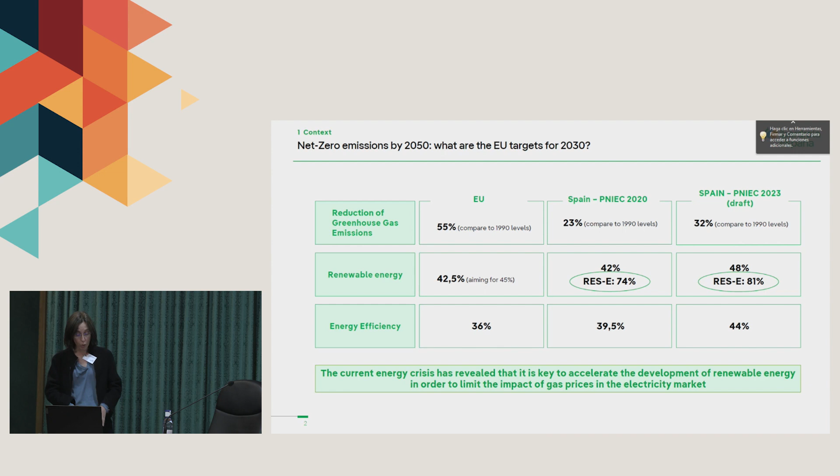In any case, what I would like to show you is that the Spanish government is moving forward more ambitious, more commitment, more greenhouse gas emission reduction, and more renewables. For the electricity sector, I think this is really challenging, because the figure we have already is that we would like our generation energy mix to be 74% based on renewables, and the new draft sets a target of 81% renewable energy in the generation mix. So of course this is a challenge, and this implies really moving forward with a massive movement on investment.

Unfortunately, nuclear is not the winning technology. According to the Spanish government, it is expected that, according to current information, nuclear power plants will close after their lifetime, and so there will be 4 gigawatts less nuclear capacity in Spain by 2030, according to this provisional draft. So what does it mean? The investment challenge is clear, and it means that we all need to accelerate. I will give you some figures so that you can understand this investment challenge.

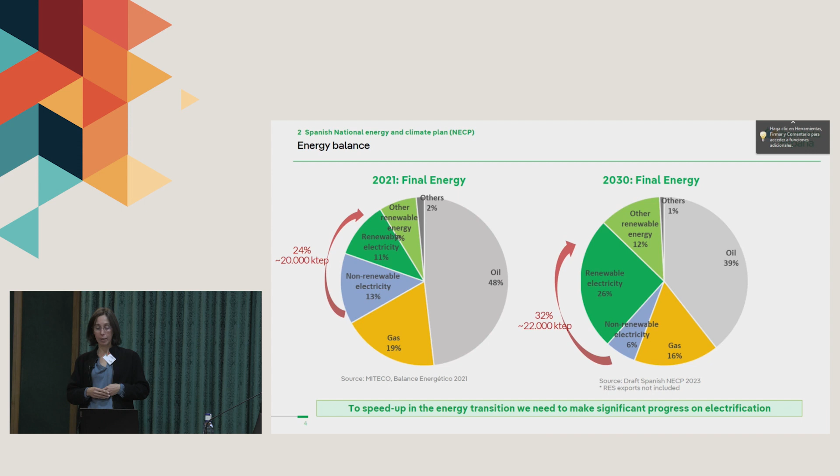That's why the message we wanted to tell you is that we need to speed up also in electrification. There is much more that needs to be done on flexible demand, so that we can take the best advantage of that renewable capacity that could be developed, hopefully in Spain.

When we look at the renewable power generation cost, we can have different data, but we know the reduction in cost has been amazing, and today it is competitive. So today we have two things: we have the technology development, which makes economic sense, and we also have what we call regulation, the economic tool to develop that.

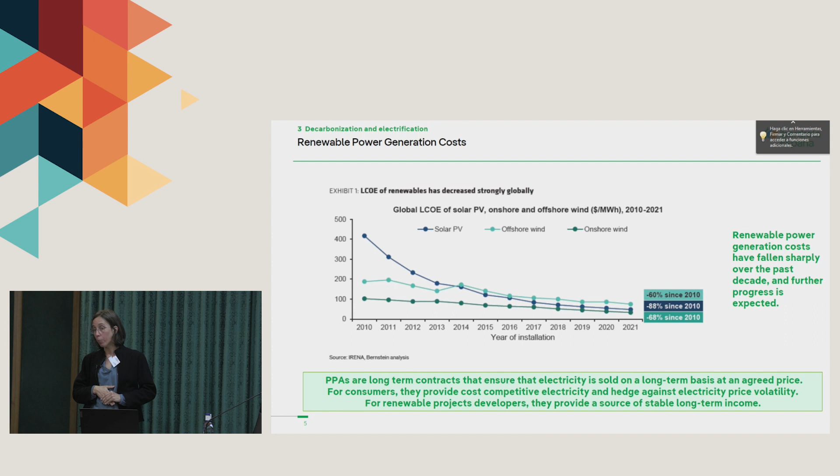In Spain, and I know in other jurisdictions it's also the case, there is a lot of development done through what we call a power purchase agreement. This is no more than a long-term contract between a producer and a buyer, which can be a retailer or a consumer, and they fix this long-term contract. The price is set. This provides price visibility for the investors, they know the revenue stream, and for the consumer, they have visibility on their costs. So it is like a perfect match, production on one side, consumption on the other, and they both have a benefit. This is something that is really moving a lot the renewable market today in Spain.

We also need storage. Everybody that talks about energy transition, at least today in Spain, recognizes the value of storage because we need to accommodate that intermittent generation. We know how to do it in the case of pumped storage hydroelectric. It's cost efficient, the technology is well known, and according to Iberdrola's data, we estimate there are around 10 gigawatts of additional pumped storage that can be developed based on one reservoir, so you only need to build the upper reservoir, not two. That means there are 10 gigawatts that can be developed in Spain and could make a difference. But of course it takes time and it needs an economic signal.

When we look at batteries, we know the market is moving fast, decreasing in cost, but we are not quite there yet. We believe the technology needs to make more progress so that it is cost competitive. So here we have a technology that is mature and promising, but when we look at the economic tool, we find that there is something missing.

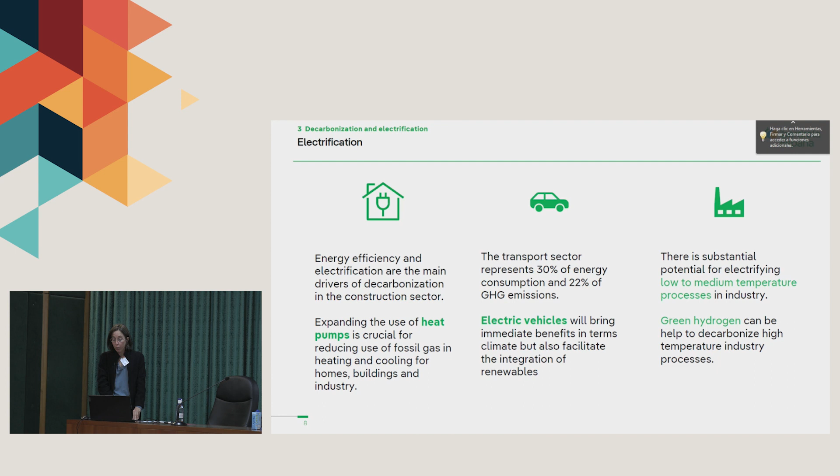The same for transport—these draft plans consider 5.5 million electric vehicles by 2030, which is really something challenging. And we are also seeing progress in industry for low to medium temperature processes.

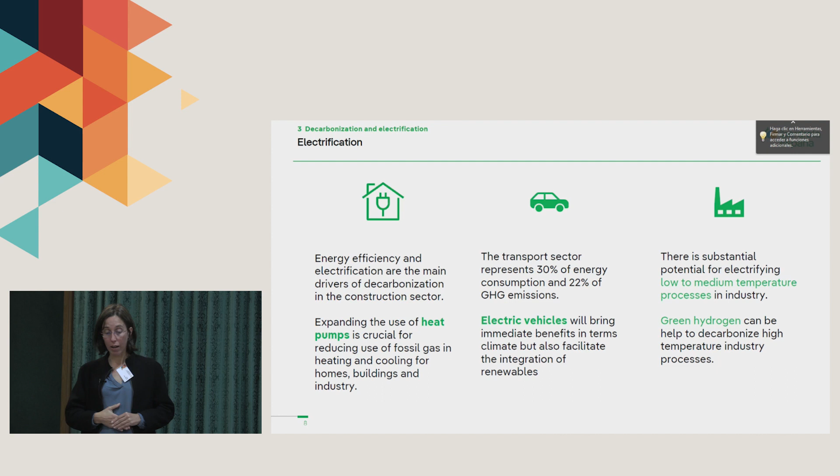So this is something which is almost there, and maybe we have to look more at what the industry needs, because they are also in the process of transforming and taking decisions now on how they can go for this low temperature electrification, which makes sense in many cases. Of course, there are others where direct electrification will never be a solution, like high temperature processes, and for that we have green hydrogen that can also be a solution in the future. We are in the process of some pilot projects there, and see how it moves.

So just to finalize, I would tell you that there is something between the production and the consumption: the networks, which many times we have not paid enough attention to, and today they are becoming a key for the energy transition. Why? Because the challenge is so big that they need to accommodate new, more distributed renewable. They have to accommodate more demand, completely different from previous times: more electric vehicles, more heat pumps, these industrial hubs where they will electrify, and we will be demanding an important increase of demand at a local point, and there will be congestions.

So we need to anticipate. Grids need to do much progress beforehand, and anticipate these investments where it could be needed. So this is where the regulatory component comes in. The grid operator needs the framework to recognize that they have to go for anticipatory investments. That is something that was not needed in the past, but is needed today, and would be even more needed in the future. So we need a regulatory change to give the economic signal to these grid operators, so they move into what we are requesting, which is to move into the energy transition.

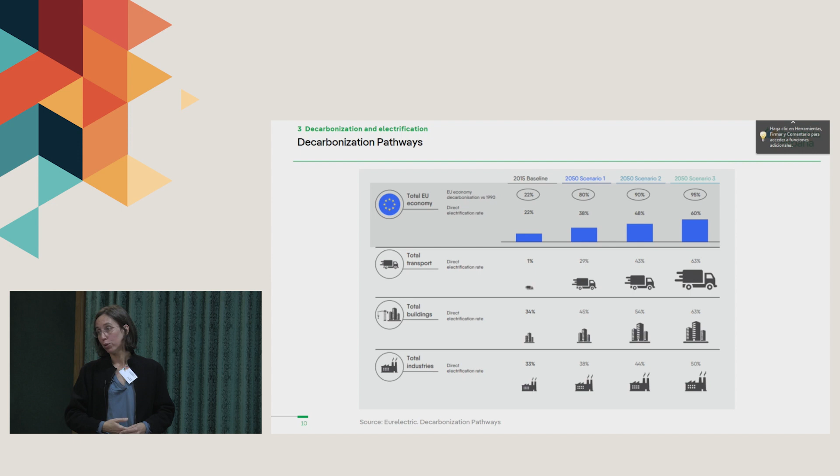And just to finalize, to show you some scenarios: this was a report prepared by Eurelectric, which is a European association of many European utilities. It's a bit outdated, but it doesn't really matter. What I would like to share with you is that in all scenarios, electrification will play a very important role in the energy mix. Eventually we will see where the limit is, but it is clear that it will provide a solution to the energy transition. Thank you very much.

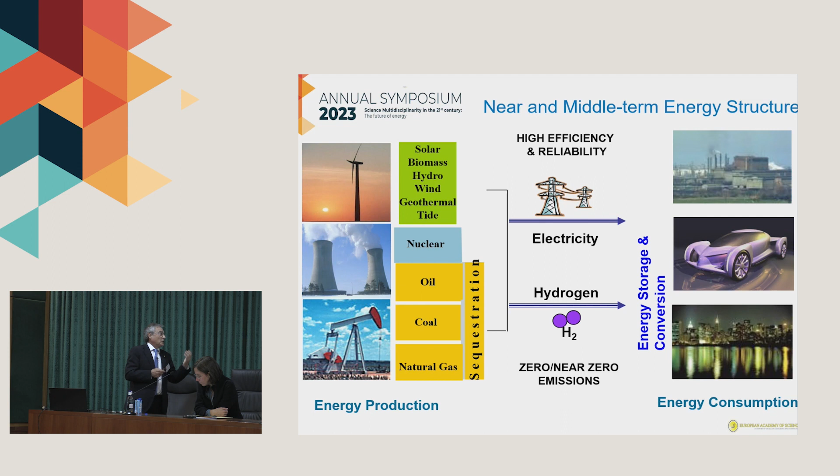In the middle term, the structure of energy production and consumption will be related to electricity with high efficiency and reliability, and to green hydrogen, in order to have zero or near zero emissions.

Energy storage is important for the generation, transmission, and distribution systems. Storage is critical. We have different aspects, for example frequency regulation and load following, cold start services, contingency reserve, and also energy services that shift generation from peak to off-peak periods.

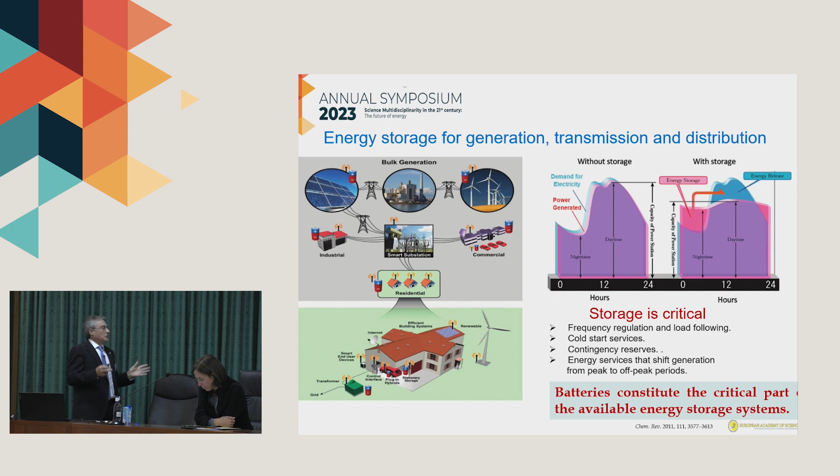Batteries constitute the critical part of the available energy storage systems. If we analyze, for example in mid-terms, automobiles, if we consider only 10% of electrical cars for 10 to the 9 cars, we need 2 times 10 to the 6 tons of batteries.

For load leveling of production, if we store only 10% per day of the whole electricity production of 2030, we need 10 to the 9 tons of batteries.

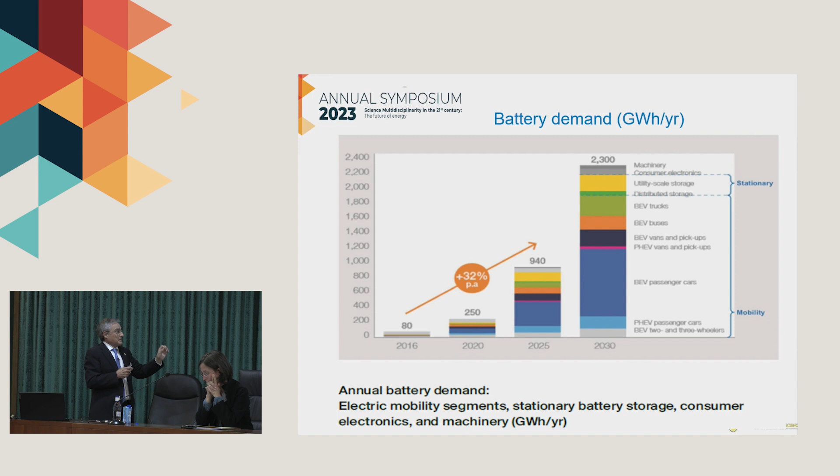We can observe the evolution of the annual battery demand over the years, and in 2030 it is approximately 2,300 gigawatt-hours, basically per year from mobility, and then stationary, mobility, consumer electronics and machinery.

Batteries for mobility, lithium ion technology application. For example, lithium ion batteries satisfy the portable and consumer electronic markets, in watt-hours.

What about the electrical vehicle market? And what about the energy storage market? My question is: is the use of lithium-ion batteries necessary or appropriate in energy storage applications, in stationary energy?

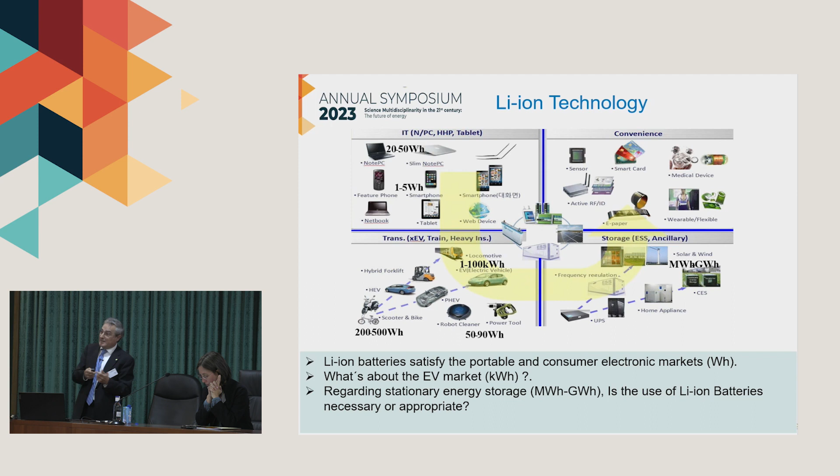So the question is, these materials contain cobalt and nickel. We know that these are toxic and expensive materials. So should we continue with this kind of material? It depends. We are going to continue and discuss that in my presentation.

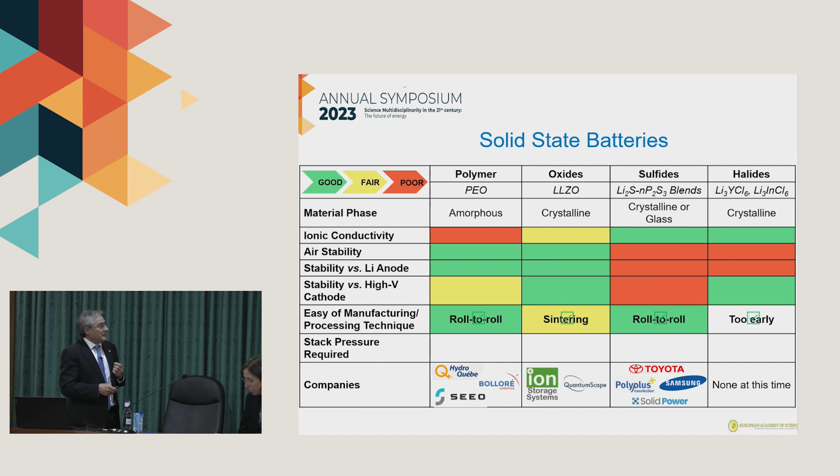Another important point is the evolution of lithium, the comparison of lithium global production, cost and demand. The lithium global production and cost increase every year, except in the last 2 years, due to the pandemic and the economic and energy crisis. But in the future it will increase significantly, including lithium global production, lithium-ion battery cells in gigawatt-hours, and also lithium carbonate cost.

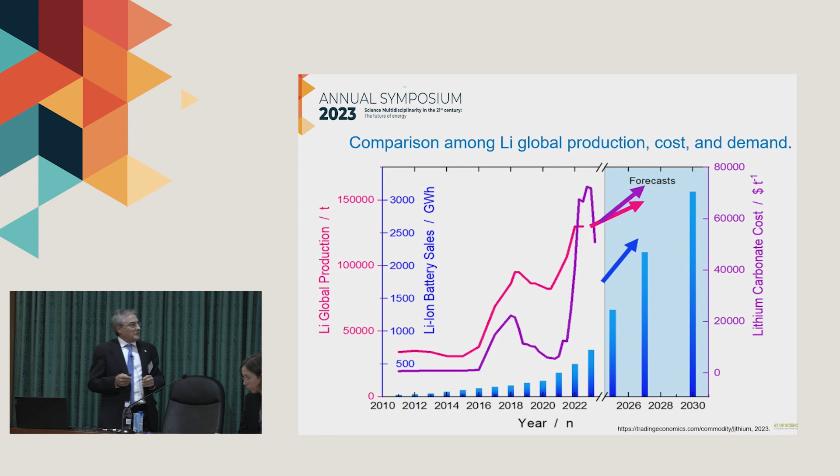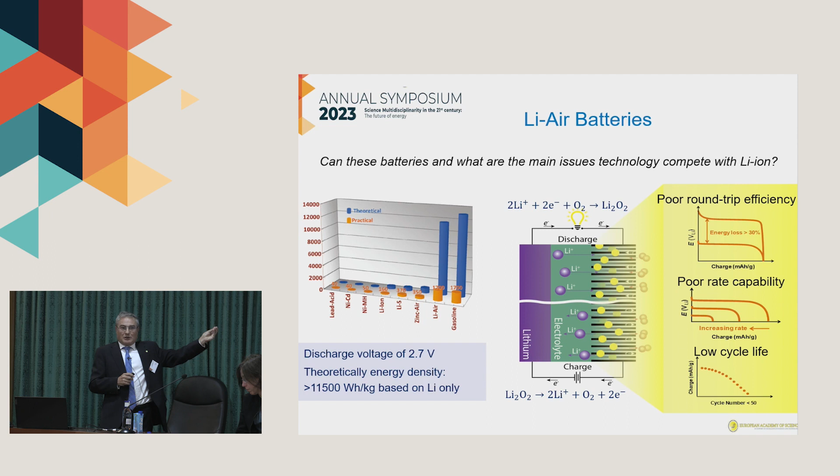Lithium-air batteries are the best battery from the energy density point of view. We can see here that the theoretical energy density is approximately 12,000 watt-hour per kilogram on lithium only, with a discharge voltage of 2.7. It's quite similar to gasoline in theoretical and experimental terms. What is the problem? These systems have poor efficiency, poor rate capability, or low cycle life. As I said before, we need at least 30 years to move to this technology, which is the best competitive technology from the energy density point of view.

Batteries for grid energy storage. In this case, we are moving to redox flow battery, sodium sulfur battery. We have here one table with technology comparison of different batteries. The first ones have lead, nickel, cadmium, vanadium, and we know that these materials are not interesting to be commercialized.

The sodium sulfur and Zebra batteries have very good energy density, very good efficiency, a good cycle life. The problem with these batteries is they work at 300 and 350 degrees C, a high temperature. If we move to the other one, graphite and cobalt lithium oxide, these have good energy density, but poor cycle life and good efficiency. And the last one is lithium titanate and lithium iron phosphate. We are using lithium in the anode and lithium in the cathode, and the energy density we have here is 50 or 70 watt-hour per kilogram.

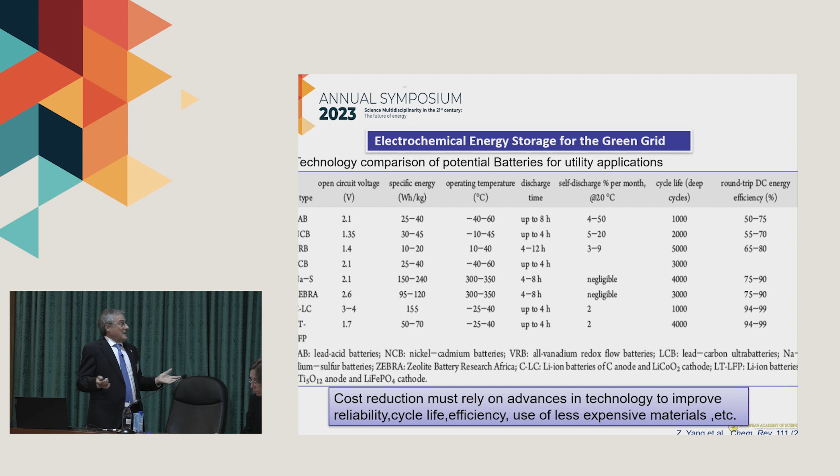The question is: is it necessary for a stationary energy application to use lithium-ion batteries? Other batteries in the market at the moment are all-vanadium redox flow batteries. Their key aspects are that power and energy are separate, enabling greater flexibility and safety, and a wide range of chemistry, but the problem with these batteries is they are expensive, too high for commercialization.

They are using vanadium, which is high cost and toxicity. So research is now moving to other materials, water-soluble organic materials, to replace vanadium in order to avoid its toxicity and cost and to decrease the overall cost.

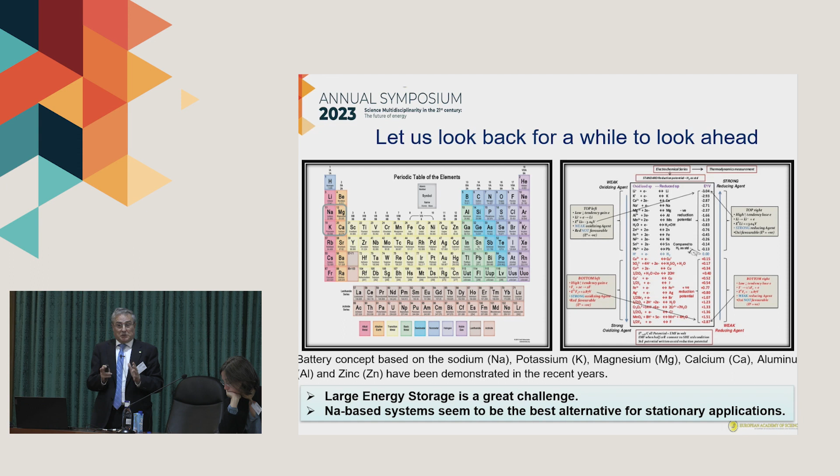At the moment, the best alternative for stationary applications seems to be sodium-based systems. Why sodium-based batteries? We have commercialized two of them, sodium sulfur and Zebra, but they are working at high temperature. So we had to decrease the temperature to move to low-temperature sodium sulfur, to decrease the cost in order to have high energy. Another approach is to work on sodium-ion in order to decrease the cost and increase the power.

If we compare the properties of lithium-ion batteries with sodium-ion batteries, we can see for energy density: in the case of lithium-ion, we have 150 watt-hours per kilogram with lithium iron phosphate, and 275 watt-hours per kilogram for layer oxide nickel, manganese, cobalt. In the case of sodium, we have at the moment 160 watt-hours per kilogram, moving up to 200 watt-hours per kilogram. For cycle life, lithium has good cycle life, 6,000 cycles for lithium iron phosphate batteries.

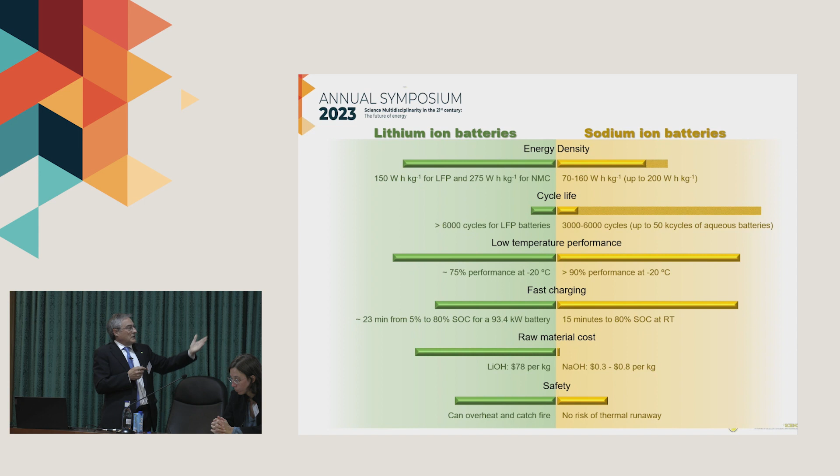In the case of sodium, we can arrive up to 50 kilocycles if we use aqueous electrolyte, with good low temperature performance and fast charging. Raw material cost is very, very competitive in the case of sodium versus lithium, and for safety, there is no risk of thermal runaway in the case of aqueous electrolyte. Also, in the case of sodium, sodium batteries don't need recycling.

CATL is the best company at the moment, but there are other companies like Hina. They have an electrical vehicle with a low speed, 70 kilometers per hour, but with sodium-ion batteries, not toxic and not expensive. BYD is also working in sodium-ion batteries. In the United States, we have Natron Energy working in aqueous electrolyte with very, very competitive batteries.

For conclusion and future trends. Electrochemical energy storage depends on the applications. For energy storage for vehicles, electromobility is a reality with current lithium-ion batteries. Beyond lithium-ion, batteries are required to satisfy the market needs, to improve the energy density.

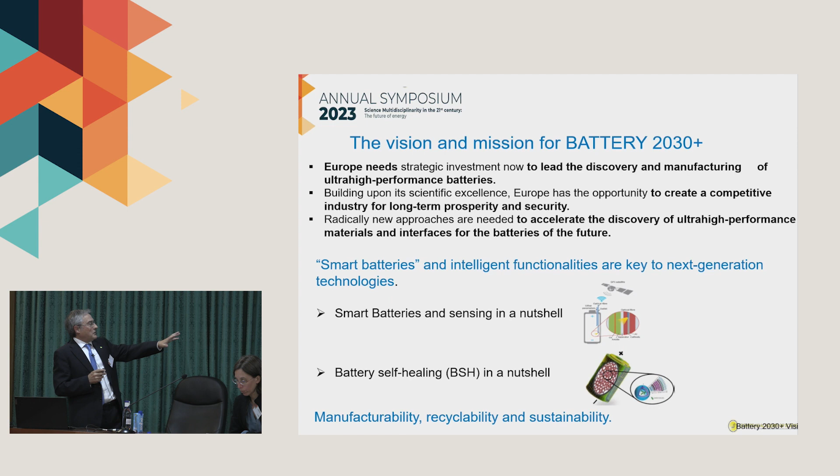To be competitive in Europe for the next 10 years, we need to think in smart batteries with intelligent functionality. Smart batteries and sensing, and battery self-healing. Other important aspects are manufacturability, recyclability, and sustainability.

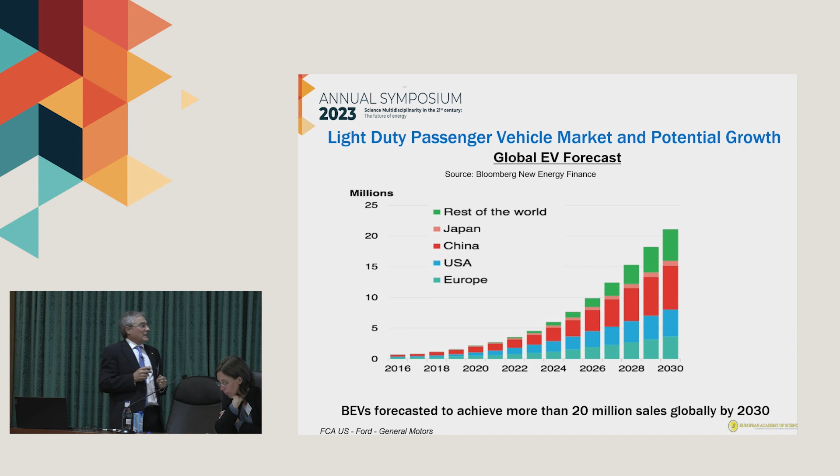If we analyze the global electric vehicles forecast, we can see a significant increase in the next years, with approximately more than 20 million sales globally by 2030. So we need a lot of batteries.

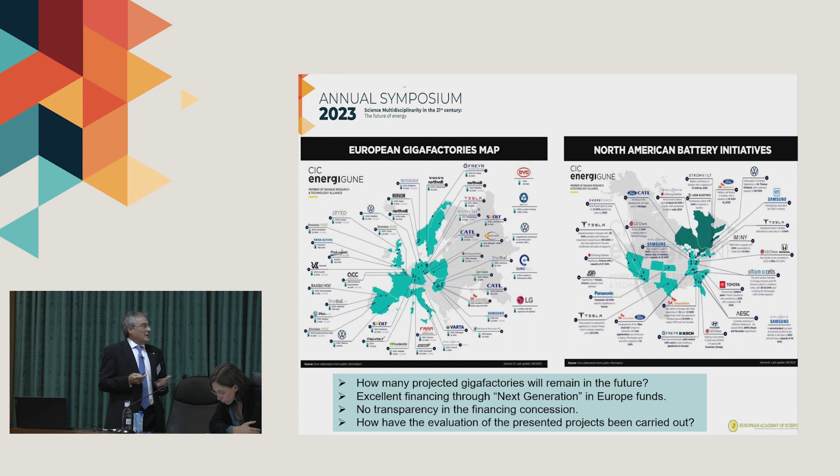Excellent financing through the Next Generation EU funds. But the problem here is no transparency in the financing concession. And also, how has the evaluation of the presented projects been carried out? This is an expert commission. Who is responsible to give the funding for this technology?

As I said before, some companies are moving to lithium iron phosphate instead of layered oxide cobalt nickel. Why? Because of less energy density, but it is very competitive from the point of view of toxicity and so on.

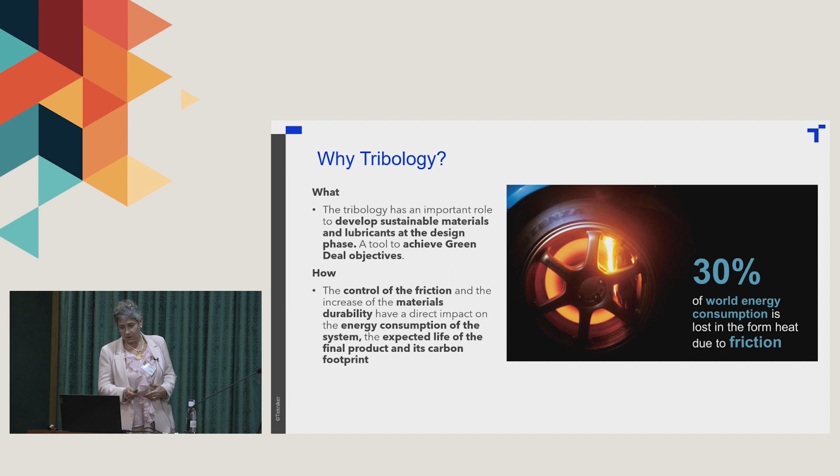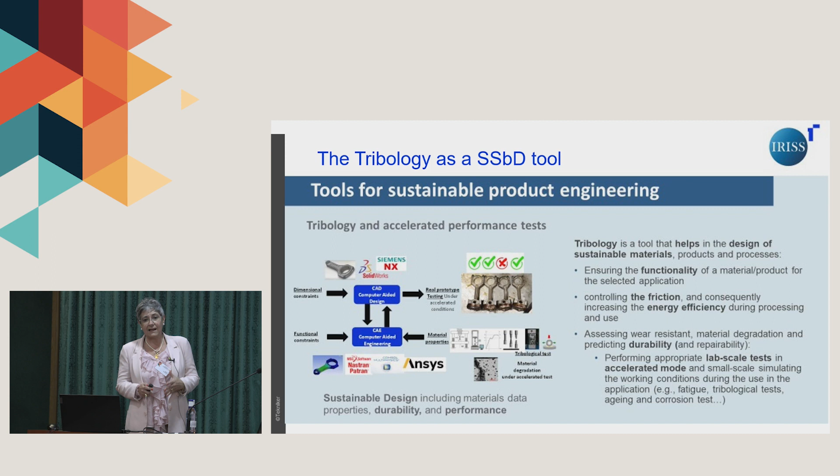Why is tribology a safe and sustainable by-design tool for developing products? Because if we introduce durability into the design of components and the properties of materials, which is not the case right now, it will be possible to design for durability, improving the guarantee of products. This requires laboratory studies that simulate the working conditions of the real application, reproduce the mechanism of failure at the laboratory, and find the material solution that can increase lifetime.

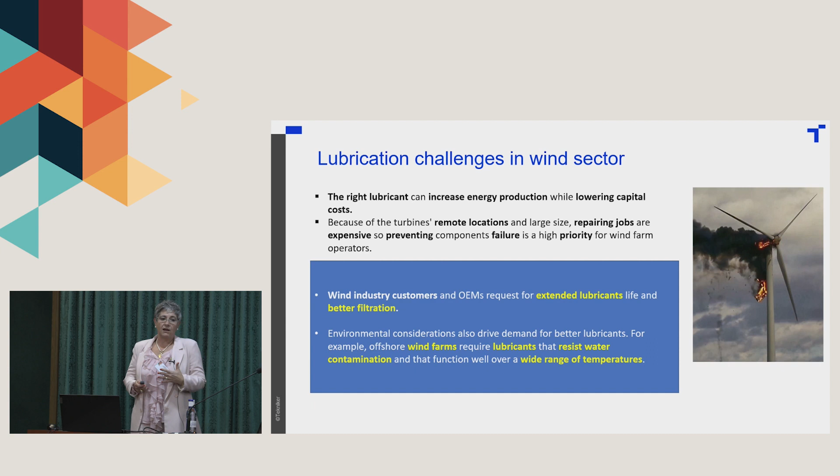What is the lubrication challenge in the wind sector? The right lubricant can increase energy production while lowering capital cost. Turbines are located in remote locations, so if it's costly to repair a failed component, we have to avoid the failure of any component. The control of the lubricant is similar to the control of blood in a person: if we control the status of the lubricant, we have a lot of information about the status of all windmill components.

What are the requirements of the formulation? High scuffing resistance, micro-pitting resistance that avoids fatigue damage, compatibility with paints and elastomers, protection from lubricant leakage, excellent aging and oxidation resistance, sufficient lubricant film at high temperature, pumpability, and a wide operating temperature range.

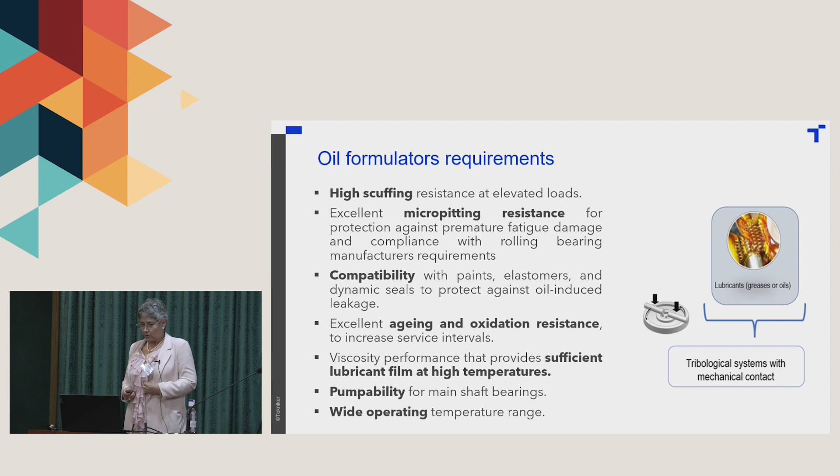High oleic sunflower oil is only one of the possibilities for renewable lubricants that can be used in windmills, but I highlight it because we have experience with this type of lubricant. It's a vegetable oil with high content of high oleic sunflower oil, cultivated in Spain, and it has quite good stability to oxidation due to the increased oleic content of the sunflower oil.

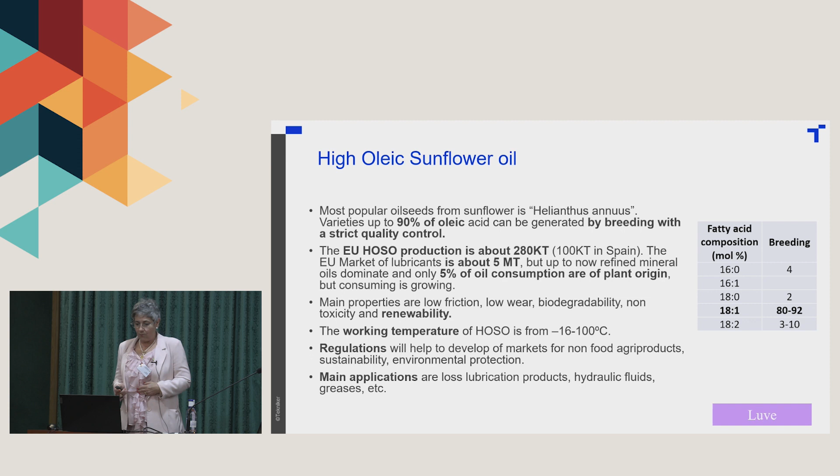The soft refining process is done since sunflower oil is prepared for food, so it's possible to reduce it for use in industrial application. It's possible to modify the production process in order to be more appropriate with lower cost. And how is the oxidation resistance of these lubricants?

We can carry out two types of tests. One is the dynamic method, where we see that the temperature resistance is similar or still better, but it is necessary to control the oxidation with time.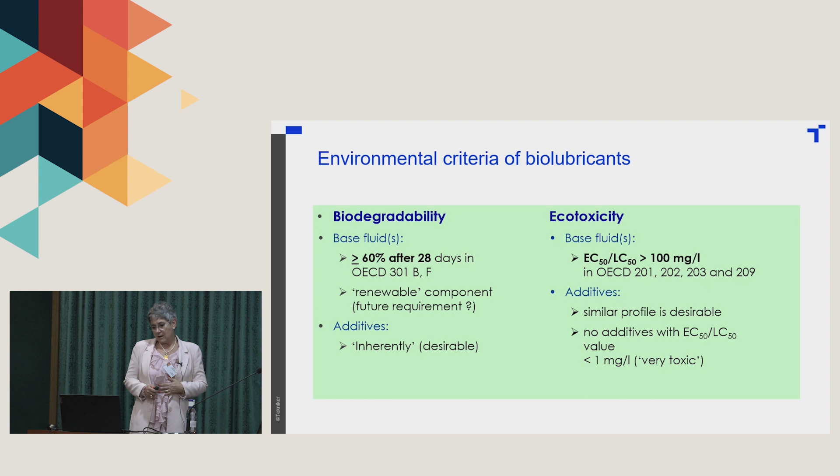What are the properties of the biolubricants? They are biodegradable, meaning that if there's an accident, they will be biodegradable. That doesn't mean it's possible to dispose of them on land, but if there's an accident, it could be biodegradable. And ecotoxicity means it is not toxic - that doesn't mean it's possible to eat, but the EC50 concentration is higher than 100 milligrams per liter, meaning it's not toxic. Also, regarding control of additives, there is no toxic additive contained at all.

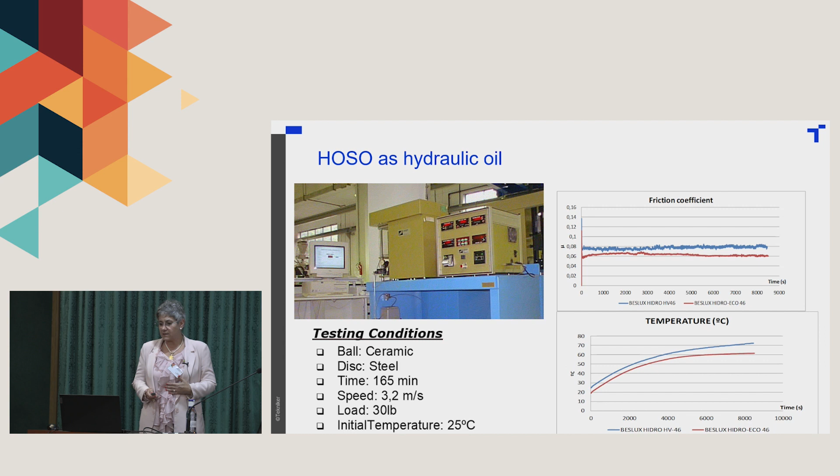How do we measure at the laboratory scale the properties of the lubricant comparing with mineral oil, for example? We measure friction and temperature, and it's possible to see that the friction coefficient is lower and also the temperature is lower. This causes less friction and less increase of temperature.

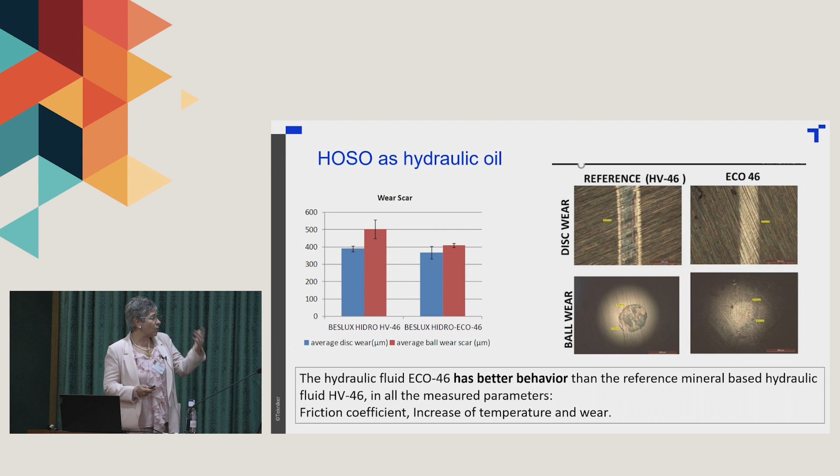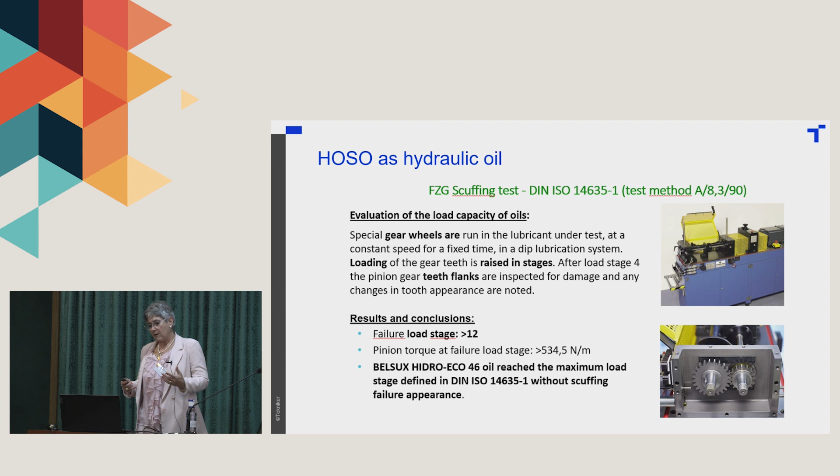It's also possible to see that the wear properties are good, with less wear damage in the biolubricants compared with mineral oil. Also, the FZG test, which is the test in gears, shows that it's possible to reach a failure load at stage 12, meaning it has good properties from the point of view of the scuffing.

But one important thing is to control oxidation, as we have highlighted. It's important to control the oxidation evolution, because we accelerated the lubricants at the laboratory scale, and we saw that there is an interrelationship between the oxidation increase and damage.

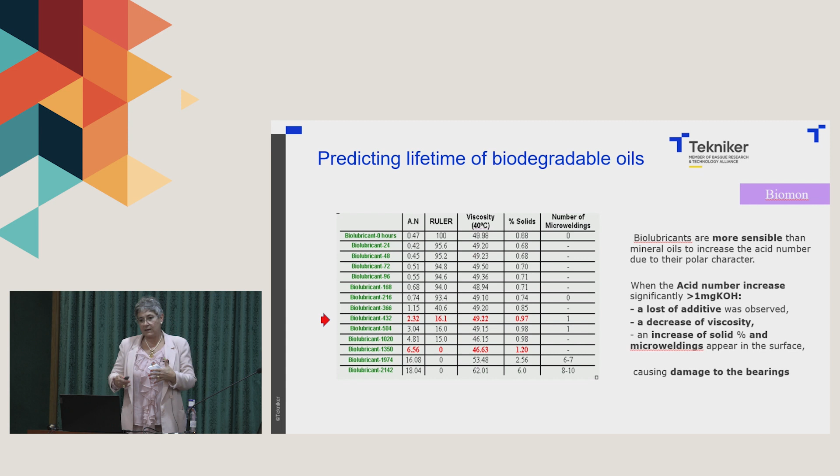It's possible to control the TAN number, that is the acid number, to also control welding in the system. Analyzing with that, and with some other parameters possible to control in the lubricant, we saw that it's important to control that the acid number is not higher than 1 milligram KOH, because if it's higher than this quantity, it could start welding in the component and damage the bearing and other parts of the component.

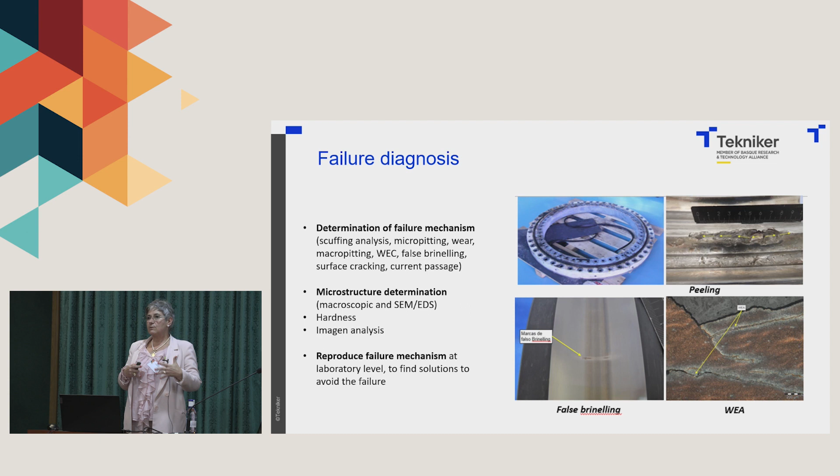It is also necessary to carry out failure analysis. That means that if there is any failure, it's possible to analyze the reason for the failure and try to avoid it. This failure mechanism can be analyzed in the laboratory, and we can give a solution in terms of material.

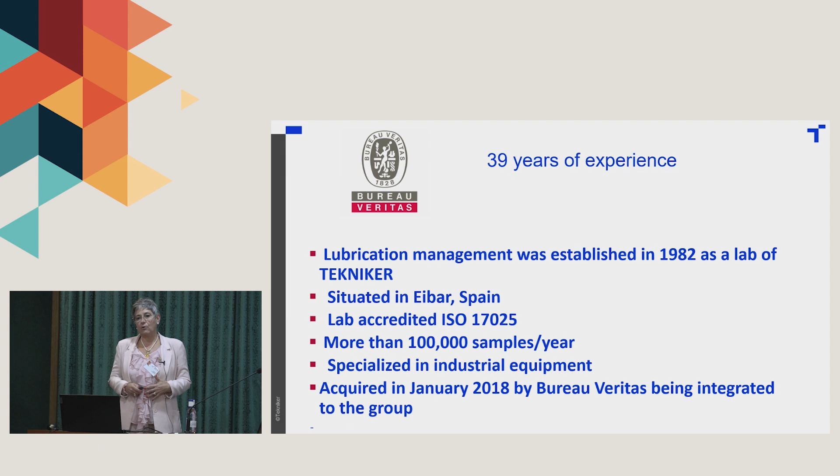Lubrication management, as we saw before, is a lab accredited with ISO 17025, and was acquired in January 2018 by Bureau Veritas from Tekniker, and now it has been integrated into Bureau Veritas, but it continues in Tekniker, and we have a strong collaboration.

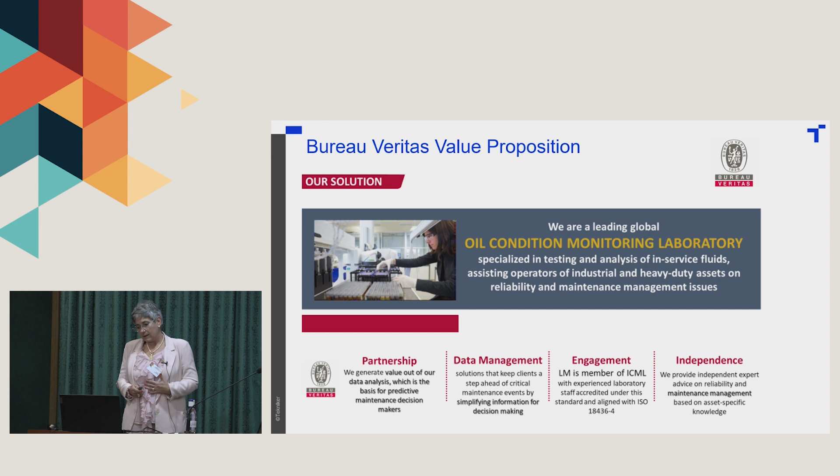They are doing oil condition monitoring, analyzing the lubricants day by day with different samples, and controlling the lubricants of different installations, including windmills. There is an operating protocol related to sample reception, oil analysis, results analysis, and reporting. This plays a very important role in the energy sector, because they can control the turbine, generator, transformer or gearbox.

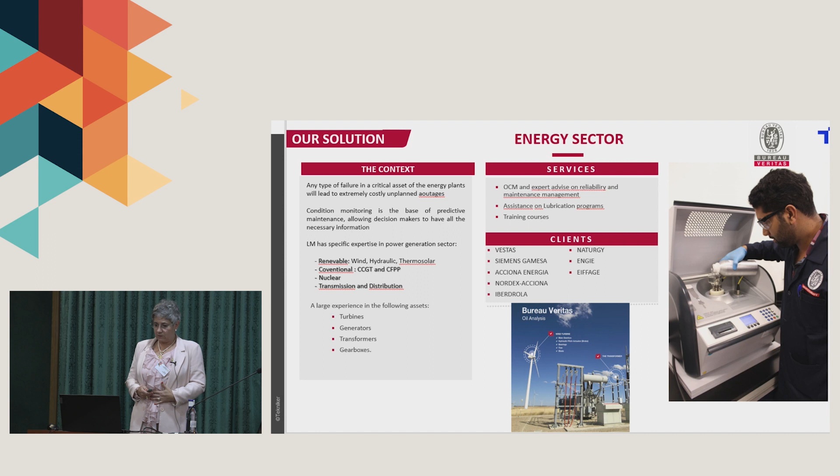They are working with different companies, so it's possible to have direct information about the different systems in different positions, and it is analyzed depending on the system, with a sampling period that can be 6 months or 1 year.

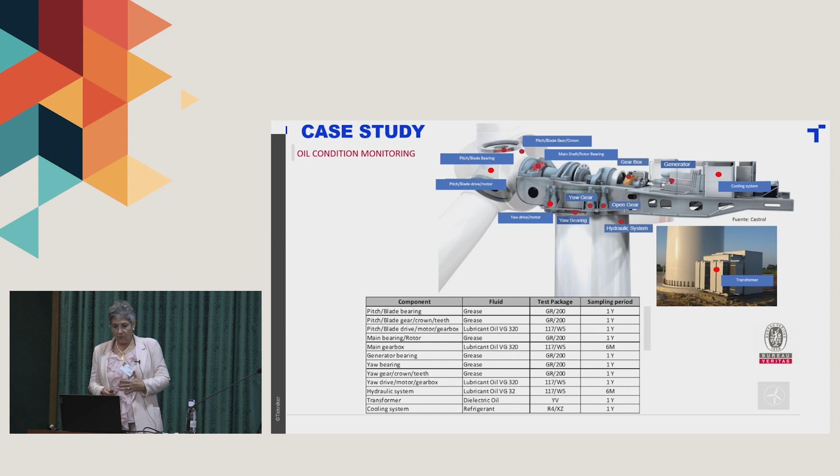Each company can control their sample, and it's possible to have customer information, equipment information, oil condition monitoring, information on oil contamination, wear debris, and diagnostics. Then it's possible to control whether the machine is okay or not.

As mentioned before, the limits of each parameter controlled during the assessment are analyzed and compared to a reference of the same system and a reference of all the systems. With that visual analysis, a visual mapping is established that can be made with several aerogenerators controlled at the same time.

I will also show the company ATTEN2, which is the second spin-off from Tekniker. This company developed sensors to control online the status of lubricants. These are oil sensors that measure the wear particles and also the status of the oxidation of the lubricant.

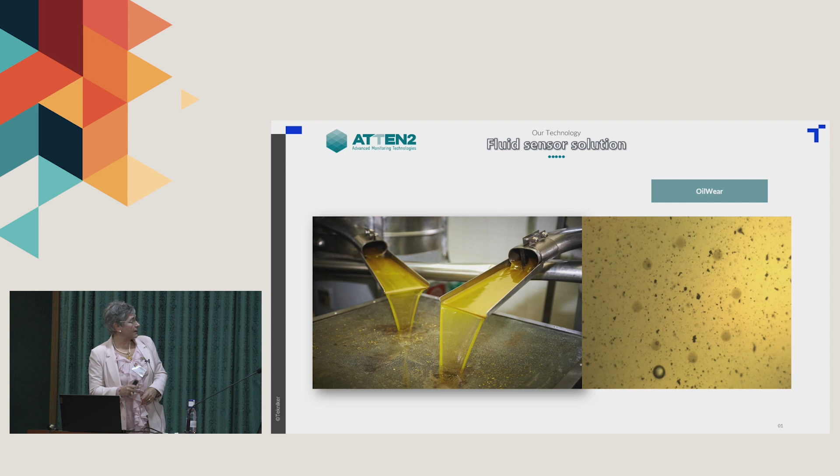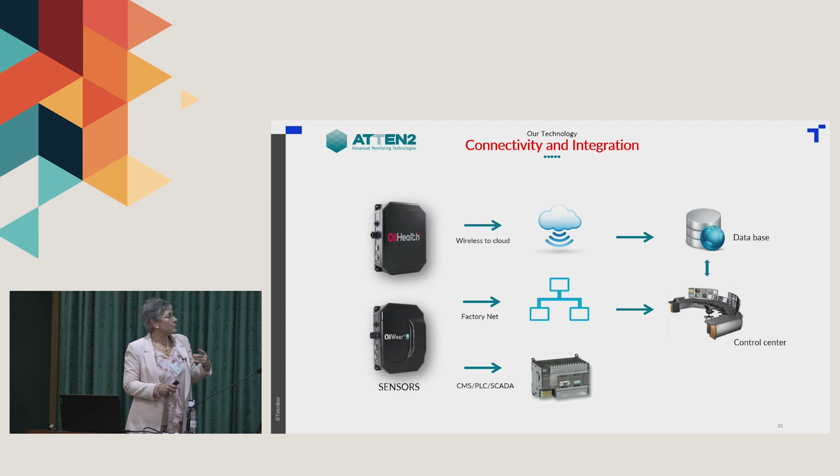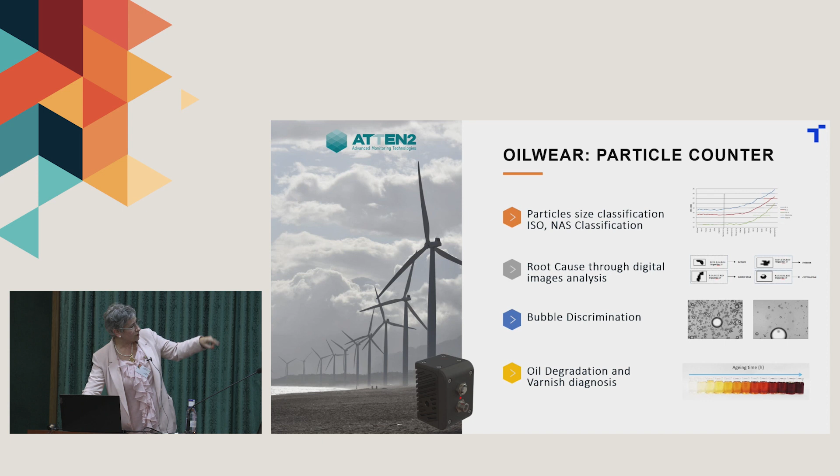This is the fluid sensor solution, and this is the sensor, and how it's possible to control it remotely, and how this relates to the standard assessment in order to revise the evolution of the wear particles and relate it to any type of failure. The size and shape of the wear particles gives information about the failure mechanism, and the degradation of the lubricant is shown with aging.

In conclusion, it's possible to use biodegradable lubricants, but it's necessary to control the oxidation resistance. It's possible to use nanomaterials to improve durability and energy efficiency. It's necessary to determine the oil change frequency and make a methodological analysis if there is any problem, in order to find the reason for failure, reproduce the failure in the laboratory, and find a solution to avoid this happening in the future. The performance of lubricants during use can be controlled by visual inspection, but also by oil analysis using sensors.

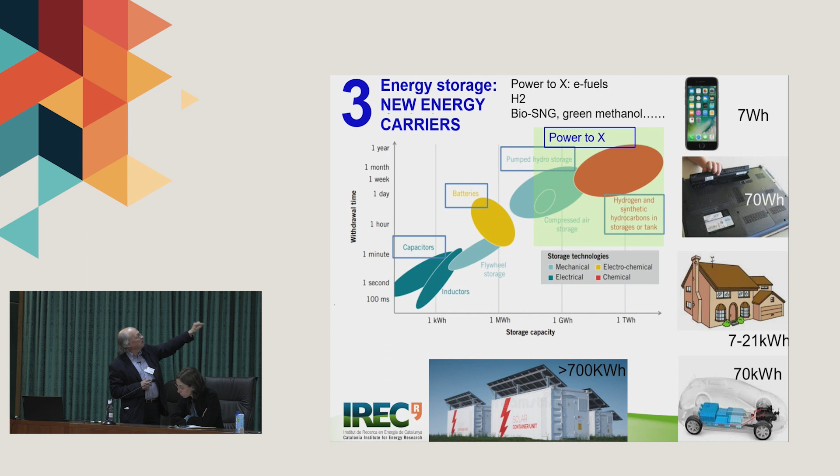This is the reason hydrogen and biomethane exist. So the objective, or the requirement, is how to store energy in a chemical molecule: hydrogen, biomethane, synthetic fuels, or other chemical compounds. So in the roadmap, we need to introduce these new energy carriers.

This means, first, green hydrogen. The second is what we can do with CO2. What is the difference between decarbonization and defossilization? Decarbonization means removing all the carbon, but this is not realistic because there are many products where you need carbon. So the problem is: from where am I going to obtain this carbon?

So this is the 5th point in my presentation. We are using a lot of organic materials, plastics, polymers, and fuels based on hydrocarbon molecules. We need to replace this carbon with non-fossil carbon, and we need to develop a new, sustainable chemistry of carbon.

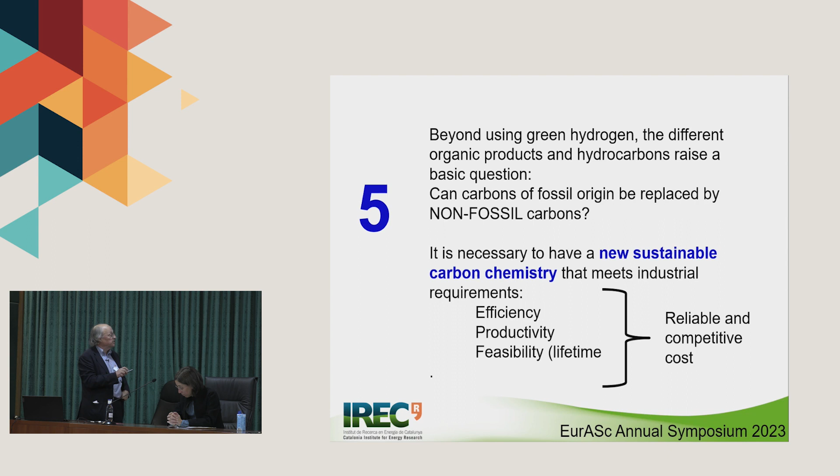But there are 3 key points. Efficiency, because in the laboratory it's possible to demonstrate many things, but for the industrial sector you need to demonstrate efficiency of the process. Productivity: producing just 10 molecules per second is not enough for industry. And the other critical point is industrial feasibility — what is the lifetime, what is the profitability if you make an investment, what is the duration of this investment? So CapEx and OpEx, finally, defining the reliable and competitive cost of this alternative.

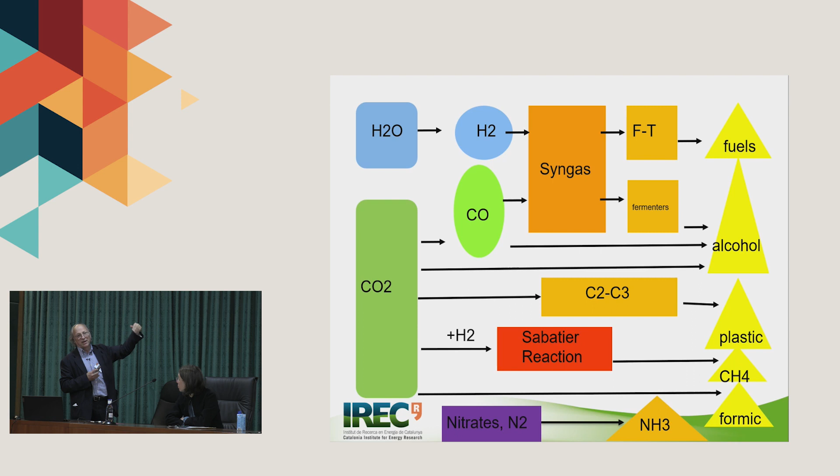From science, you can elaborate many of these pathways. From water and CO2, you can produce hydrogen, carbon monoxide, syngas, Fischer-Tropsch products, and synthetic fuels. You can use the fermentation process to produce C2, C3 products. Via the Sabatier reaction, you can produce synthetic methane. From C2, C3 molecules you can produce ethylenes, so plastics and polymers, synthetic methane, and also deal with nitrogen.

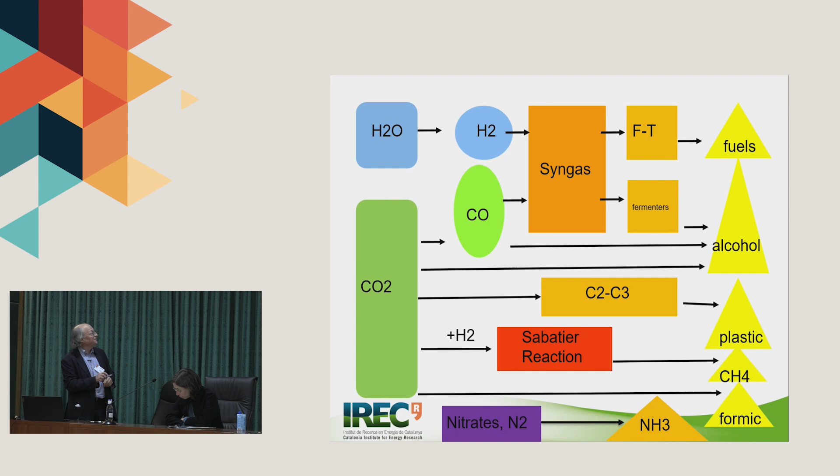This morning the question of nitrogen was shown. It's even better to use nitrates, because from a chemistry point of view it's much easier to reduce starting from nitrates, just to get ammonia. What is our scientific knowledge offering to do this process?

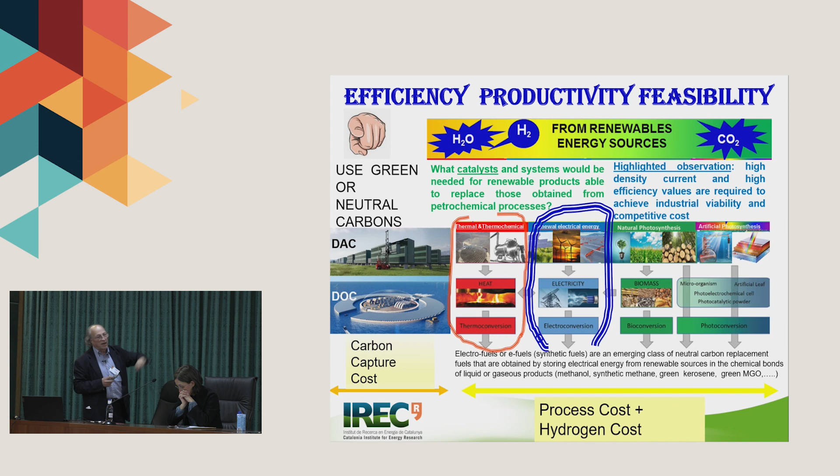Green carbon, or just from the air, or from the ocean — DAC and DOC, this is the official name for this carbon capture process. With these carbons and hydrogen, we can apply thermochemical transformation or electrochemical transformation. The other processes are artificial photosynthesis and natural photosynthesis, but we are interested in thermochemical and electrochemical as alternatives for the future.

Many challenges: productivity, electrochemical process. If we are not able to arrive to even near amperes by square centimeter in the electrodes, productivity is not so interesting from industrial point of view. So this is the first challenge.

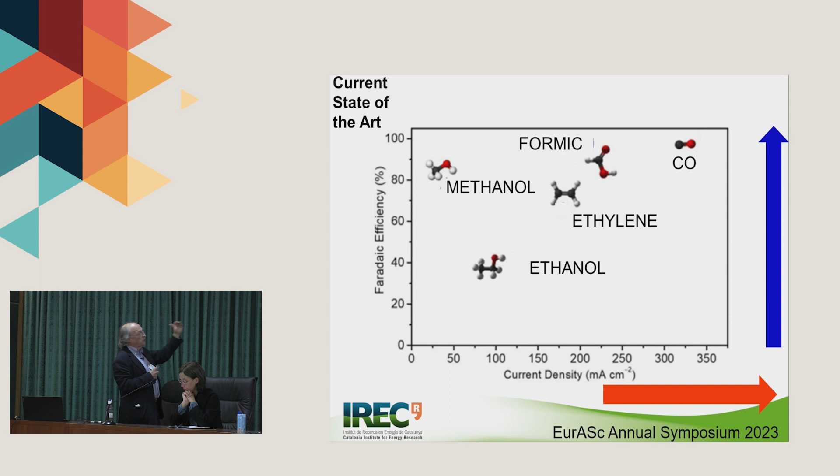And the second is the Faraday efficiency. I can introduce the energy to the molecule just by electrons, but not all the electrons are reacting. So this is the Faraday efficiency concept. Still there are very good values for some products—formic acid, carbon monoxide, methanol—but for ethylene, which is quite interesting for the chemical industry, or for ethanol, efficiencies are still very low.

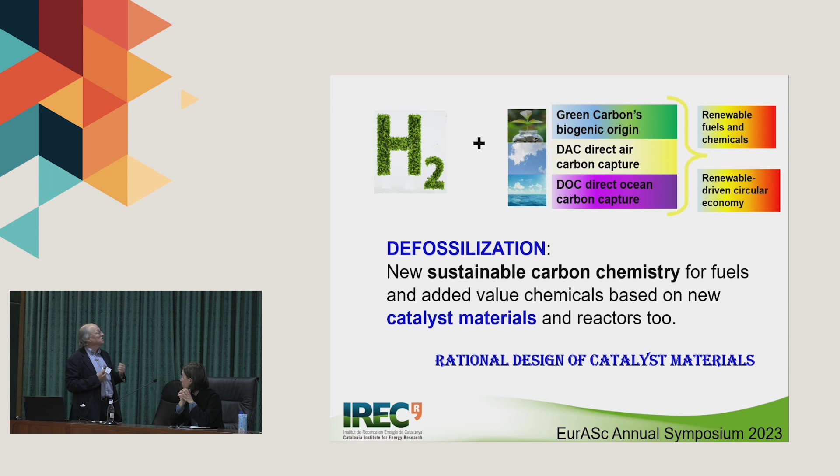And then hydrogen, the three possible origins from the carbon, this is the basis for the defossilization. But to be successful, we need to improve this process. This is the challenge for scientific people: rational design of the catalyst material. This is the main problem—how to improve the rational design of the catalyst, just to increase productivity, efficiency, and also get very long lifetime.

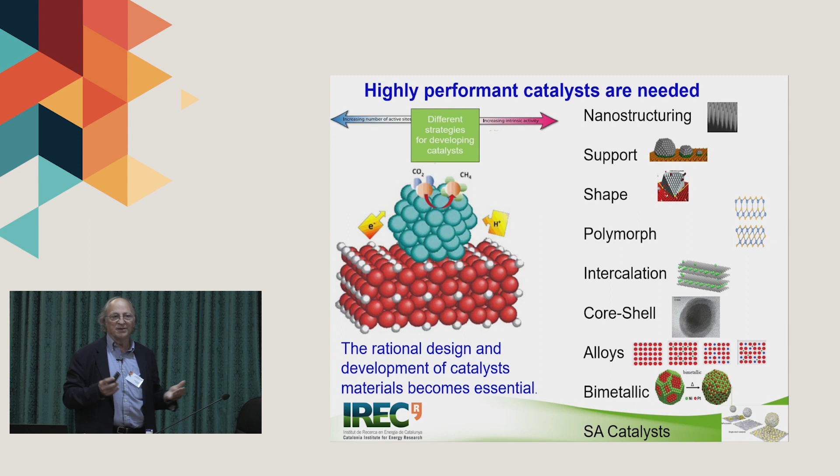Okay, and then to improve the other parameters, you need to apply science, rational design of catalyst. No time, but you can imagine it. You can put here all your creativity, all imagination, and define different nanostructures, different support materials, different shapes, polymorphs, intercalation, core shells, alloys, bimetallic combinations, and even single atom catalyst ideas. That is a very nice idea, just to improve the capacity.

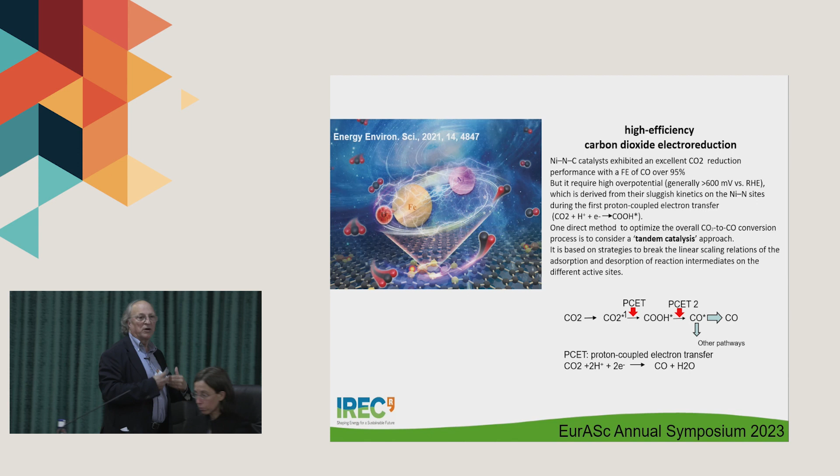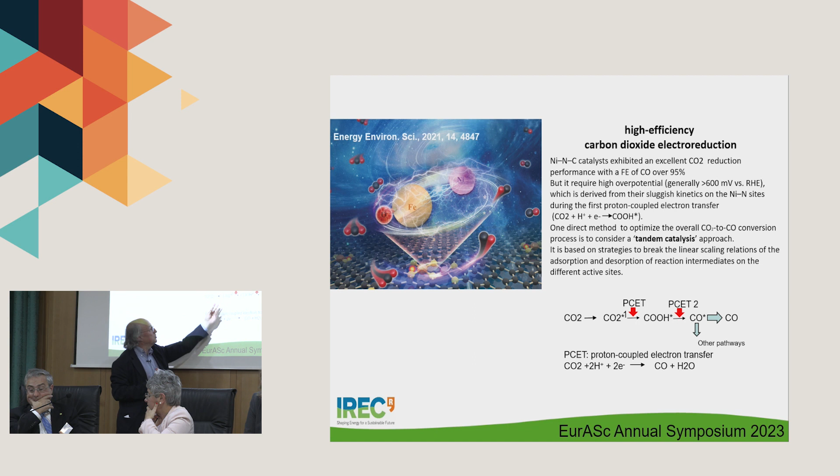And just to finish, two examples of how you can contribute to improve this technology. Observe: CO2 to carbon monoxide, okay, you have two steps. And then in the first step, maybe you need one catalyst, and for the second step it's better another catalyst. And then the challenge is, is it possible to combine two catalysts? For example, in this case we try to combine, after analysis of the characteristics of the first step and the second step, nickel and iron.

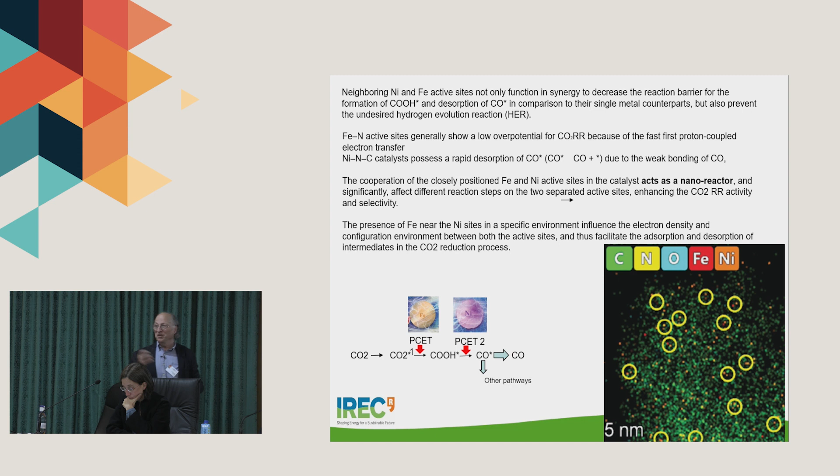We arrive at the idea that for the first step, the proton-coupled electron transfer, iron is better because it has better parameters, and in the second step nickel is better. So the idea is, it's possible to make synthesis getting one atom of iron and another of nickel together, just to stimulate this transition. This morning the colleague Hermenegildo was talking about the MOF—this is based on MOF design.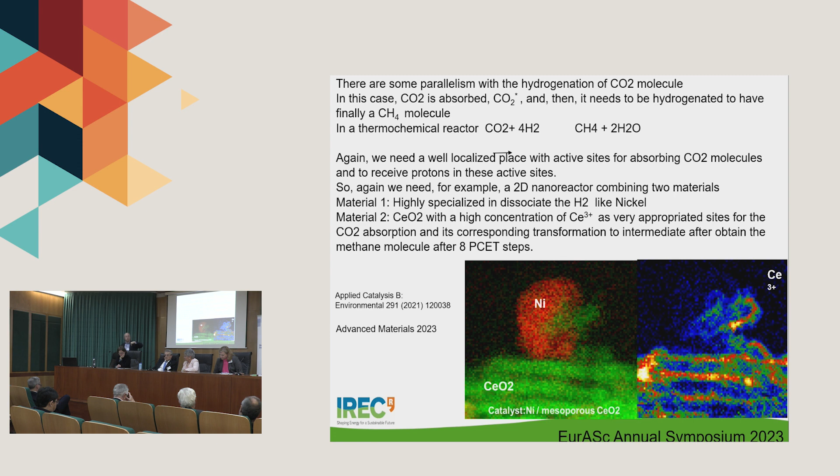How to get ceria +3, because I have ceria +4, the absorption of CO2 is not good. So this is one example of the design. I put nickel.

The nickel is producing a spillover of the hydrogen, and this hydrogen is reducing the ceria +4 to ceria +3. Immediately, CO2 is absorbed and fixed there, and it can receive more and more hydrogen until it is transformed from CO2 to methane.

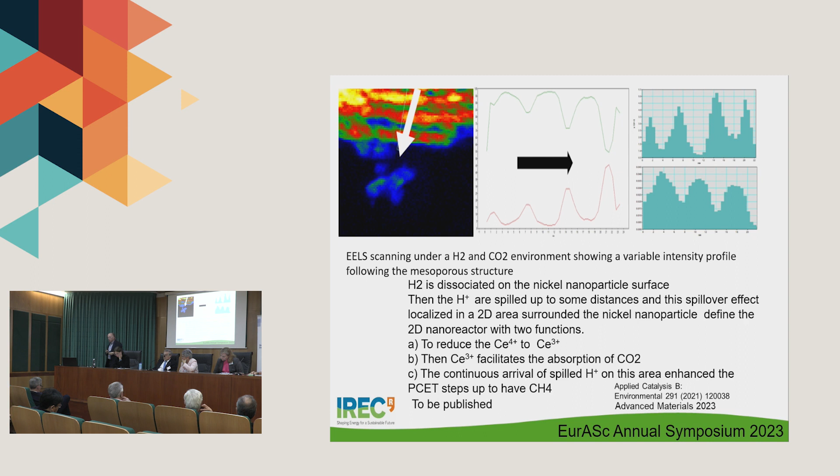This is what we observed, and it's possible to determine that the concentration of ceria +3 is decreasing as you move away from the nickel particle position. So that demonstrates the effect of this. Well, this is a detail. Just to finish, the time is running very fast. Just to finish, yes, I finish.

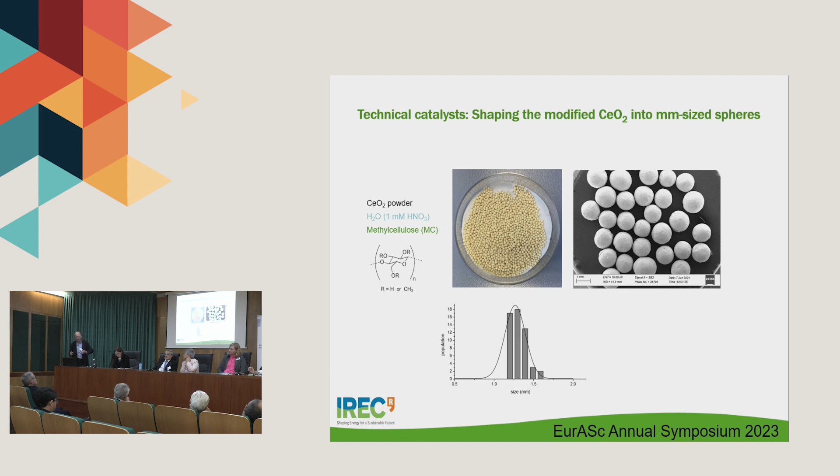The last slide. I was talking about the rational design of catalysts, but don't forget that this is in the laboratory. Then you need to introduce this catalyst into the real reactors, and the real reactors use these spheres, big size. So this is another step, how to move from the catalyst to the technological catalyst. That is different. And the second point is we need to improve the reactors.

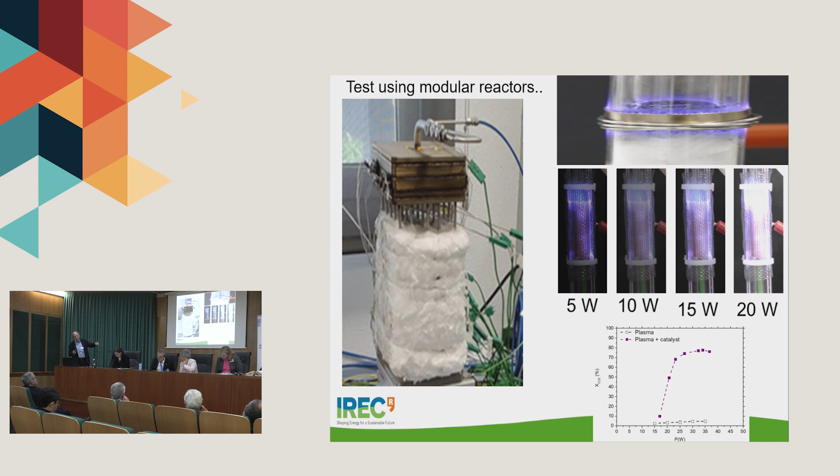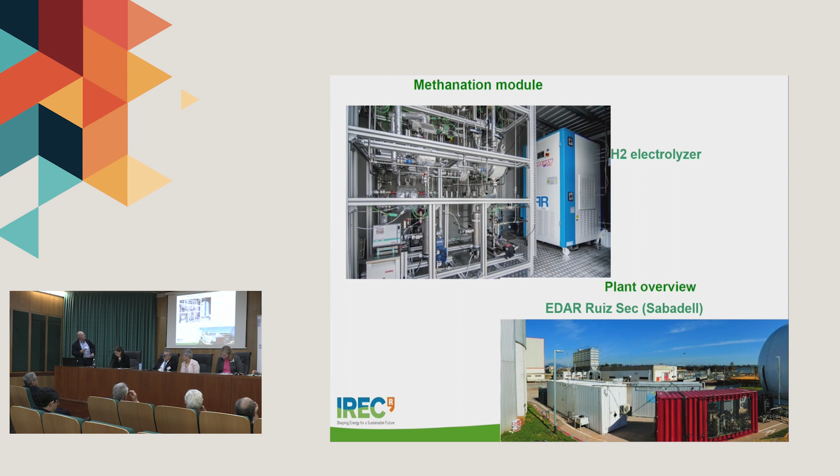This is a different example of reactors, one based on plasma, another is not. And also, for example, this is a practical pilot plant that we were running in Sabadell, just to produce methane from biogas. To finish, last one.

We will start with the questions, comments.

I have a question for you, Sarah, my dear student. I have several questions, in fact. One is, you talked about electrification from now to 2030. You said it's true that we are in the 20s and we go to the 30s. And my question is, what is the expectation for 2050 or 2060? This is my first question. My second is...